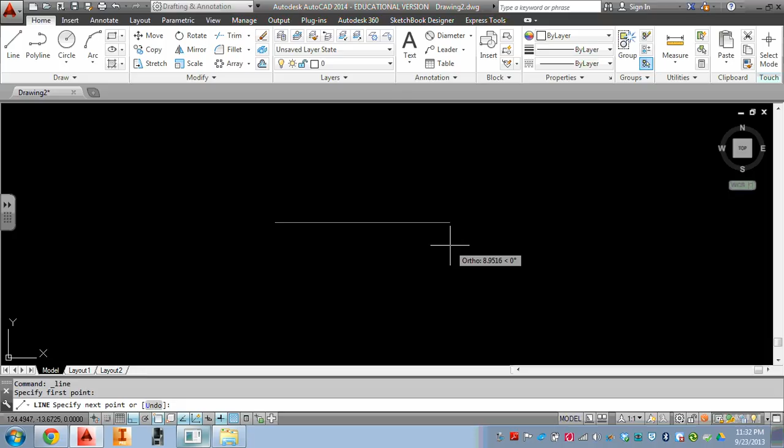Okay, for this cover plate, you're going to go ahead and draw a 6 by 6 square. Close it off. Now you're going to offset it.

So we'll go up here, offset 1, offset here, here, and here.

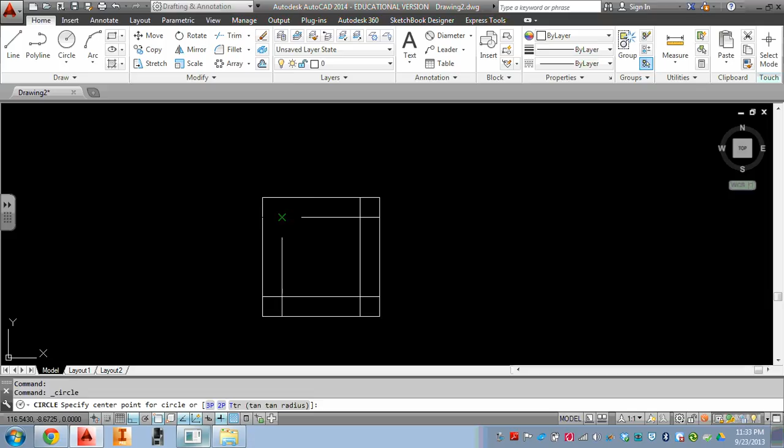We also need the center, but I'll show you what we're going to do for this one, or what I would do. I draw a diameter of 0.5. What I would do is change this to our object line.

And what I'm going to do is I'm actually going to use the array, a rectangular array. So if I select that, you can go ahead and get crazy with this.

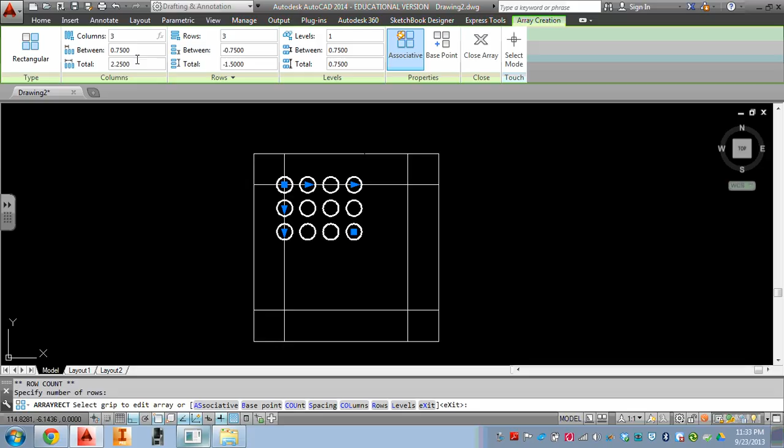Columns, how many up? If you want to go up, we'll pull it down, and now we can say we want 3 columns. In between each one of them, we have that distance down there too.

Then we can do the same thing here. We can do -2. You've got to keep it within the same coordinates. Hit enter. Problem is we got that one in the middle.

So what we can do is type explode, select it, and erase that.

So what we're going to do is draw a line midpoint to midpoint, midpoint to midpoint, and go ahead and draw a big circle in the middle.

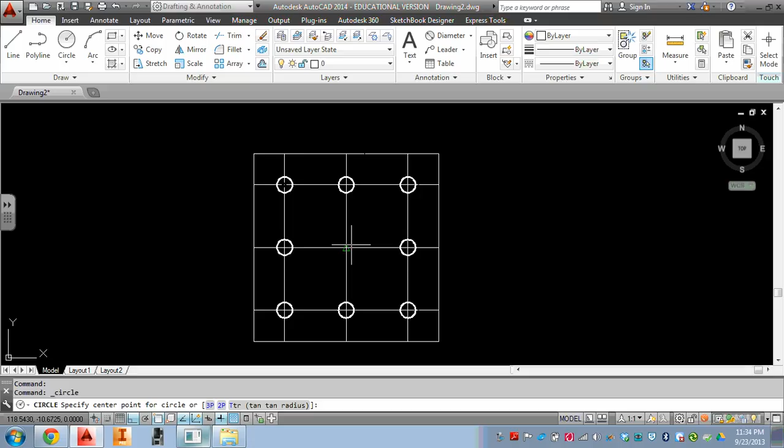D3 for diameter 3. Let's go ahead and change these all to object lines here.

And then what we'll do is, usually I'd offset this through, what I'll do is an offset. It's 1, so I'm going to do 0.75.

I'm just going to come in, keep these. Whoop, I'm going to offset it to 0.5. And I'm going to offset 0.675.

So when I do that, I'm going to go ahead, and these lines are just temporary. Almost can consider them construction lines, because once I'm done with them, I'm going to erase them.

Erase, select these lines, select that line. I'm going to make these center lines for my holes. I already have that line type selected.

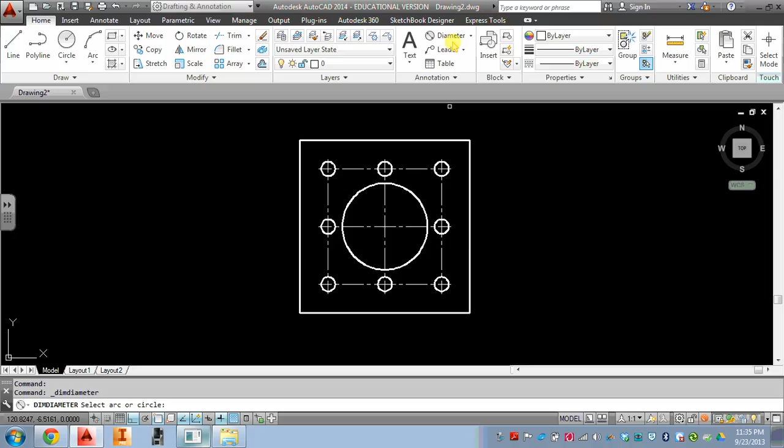Throw some dimensions on this and be done. So diameter, repeat the command.

Enter TYP. Got that. Let's throw some linear dimensions on the side.

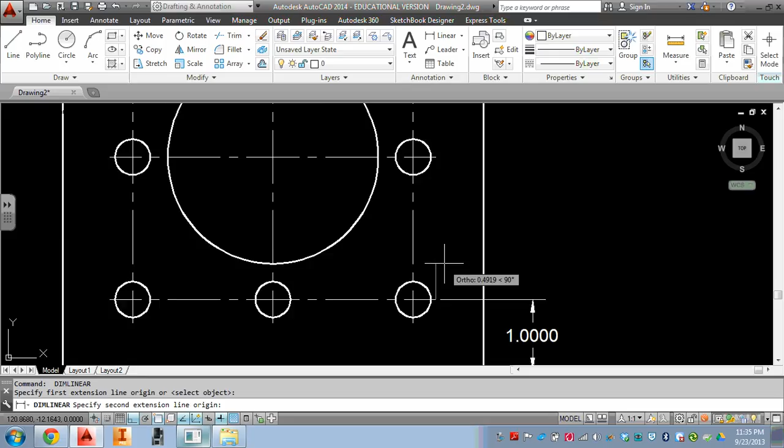Make sure you do it to the end so we got our extension lines. Endpoint to endpoint. I want to see the extension lines right on top of each other. There will be, but I don't want to see them overlapping the center lines.

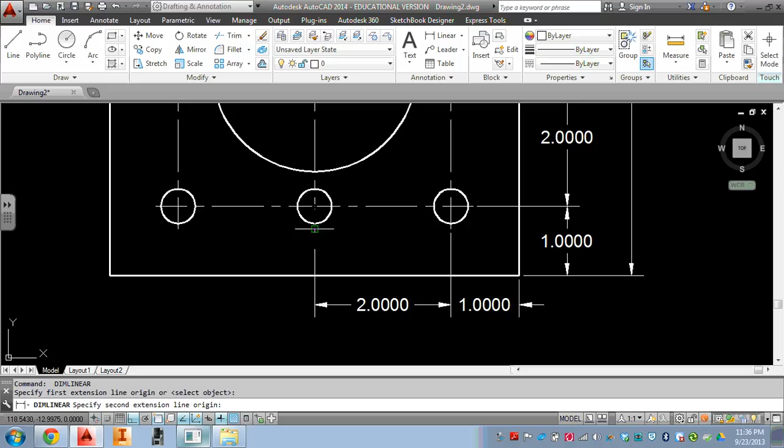Let's go throw one major one over here. Repeat the same thing down this way. And one big one down across there. And that is it for the cover plate.